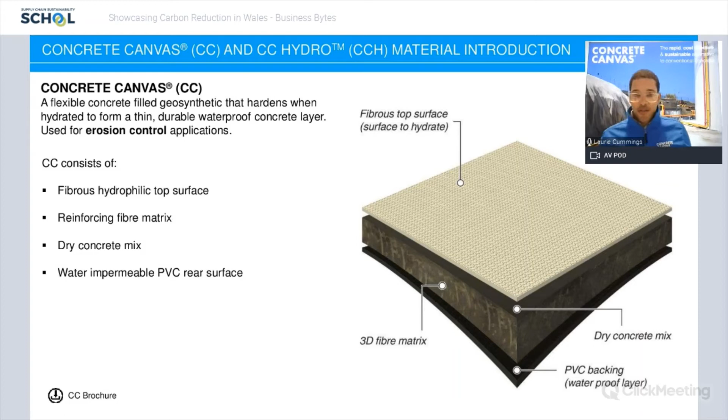Now, the primary use of concrete canvas is for erosion control, and it's used across the civil engineering industry, from the rail to the road sectors, public works, so you're looking at your local councils, and across into the mining and petrochemical industry. So there you can see in the presentation what concrete canvas is, it's cut through the material. We also manufacture concrete canvas hydro, which combines the erosion control solution, which is concrete canvas, with that blue hydrocarbon resistant geomembrane backing.

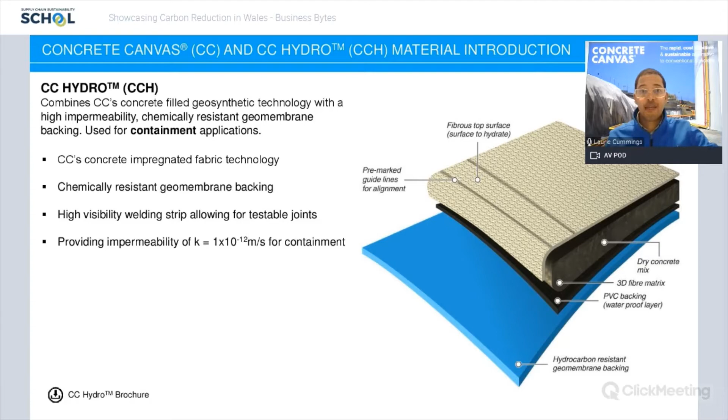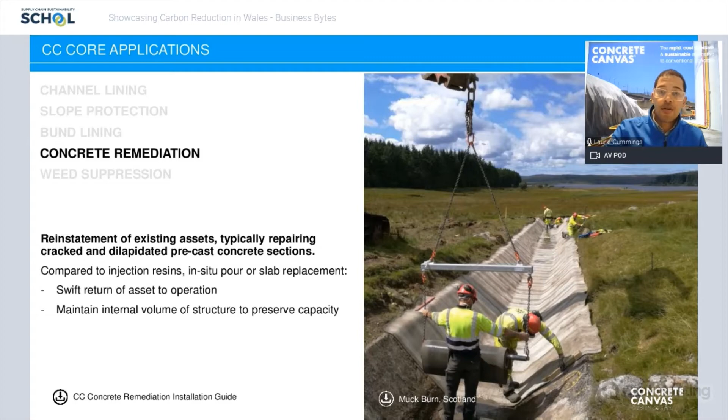That means the concrete canvas hydro material can be thermally welded to give an impermeable, totally waterproof barrier, and it's used for containment. So when we think about concrete canvas and its applications, it's used for rapid channel lining, slope protection, bund lining in the petrochemical industry, concrete remediation, so relining old concrete assets, and weed suppression.

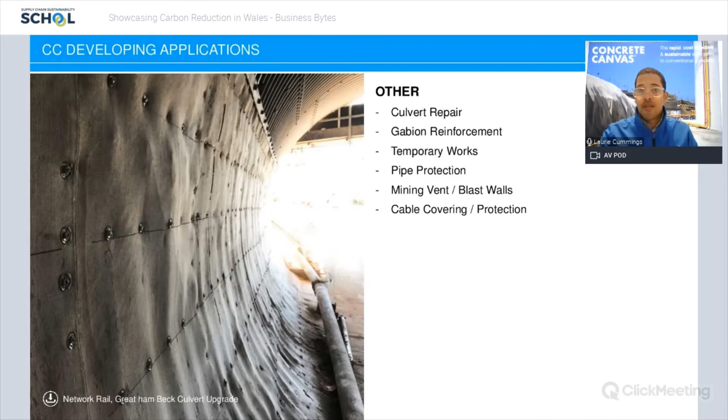And here's a list of the other applications it's used for, as you can see here: culvert repair right through to cable covering and protection.

Moving on to the sustainability credentials of concrete canvas: in 2020, we commissioned Ricardo Energy and Environment to conduct a life cycle analysis of the concrete canvas material and compare it to ST4 poured concrete. ST4 concrete is a widely used strength of concrete on site.

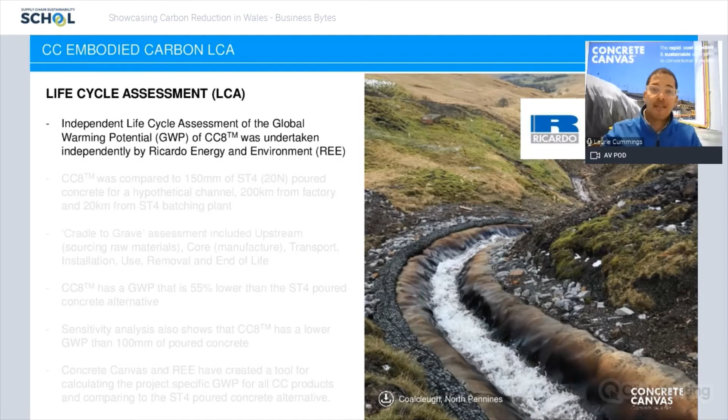And typically it could be installed on a channel for channel lining purposes. So we got Ricardo Energy to look at the life cycle analysis from the sourcing of the materials, our upstream carbon footprint, compared to ST4 poured concrete for channel lining at typically 150 millimeters thick, and compare the carbon analysis and global warming potential during installation right through to removal and end of life.

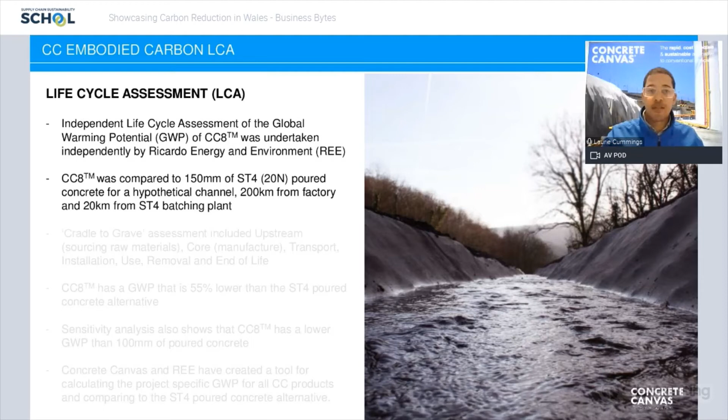The concrete canvas material is 8 millimeters thick. It can be as thick as 13 millimeters and as thin as 5 millimeters. Our most commonly used material is the 8 millimeters thick.

We compared it, and the Ricardo Energy report found that using an 8 millimeter thick concrete canvas material would give you a global warming potential saving of up to 55%. That's because you save on using a carbon-rich product that is concrete, as you use physically less concrete. When the material is only 8 millimeters thick, compared to 150 millimeter thick ST4 poured concrete, you're not going to need that much material.

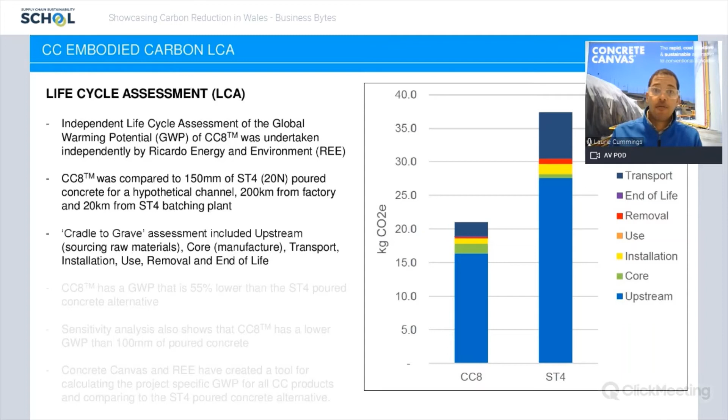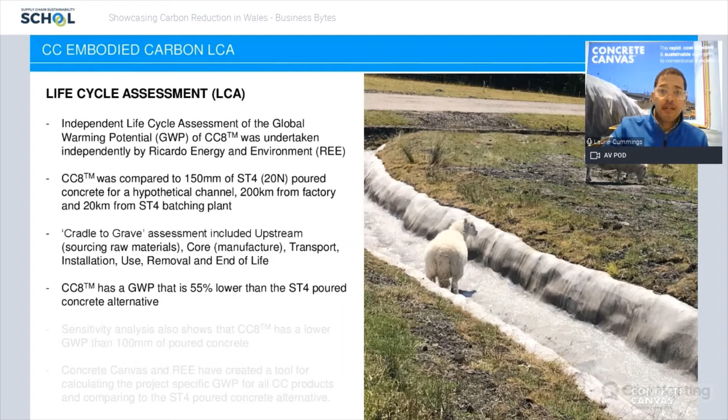Also, and more to follow on the user benefits of concrete canvas, you've got a very low logistical footprint. You can fit more concrete canvas on a vehicle than you could for ST4 poured concrete. Even if you were to reduce the amount of traditional concrete on site, you would still realize savings when using the concrete canvas material.

Continuing with the sustainability of the material, we have a range of typical clients, and we've been specified on a number of Natural Resources Wales projects, one being the Cynrig hatchery in South Wales.

Environmental bodies such as Natural Resources Wales specify the material because they realize it's got a lower carbon footprint and it's also a sensitive material for the environment. This particular project was right next to the Cynrig salmon hatchery, south of Brecon.

Just quickly touching on the profile: we're a Welsh company, based just outside Pontyclun, just off the M4. We're situated at our latest factory, which we've renovated.

In terms of sustainability of the workforce, the majority of our workforce live in the Rhondda Cynon Taf Council. We're an excellent employer of local workforce, but we are also an internationally based company.

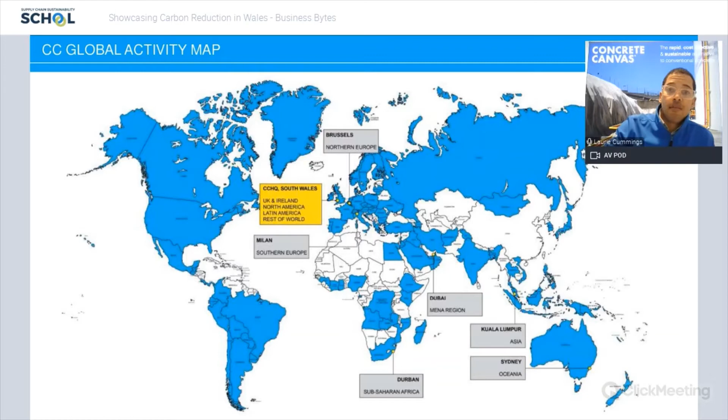As can be seen here from the global map, as of last year, 80% of the material was exported to over 80 countries across the globe.

Our clients are numerous, but within the local area, I've worked with the South Wales Trunk Roads Agent, North Wales Trunk Roads Agent, Natural Resources Wales, Welsh Water, and a myriad of local councils and unitary authorities.

The local contractors we work with include Alan Griffiths, Waters, and Jim Davis. There are quite a few local Welsh-based contractors we work with that recognise the value of the material.

This was just a snapshot of some of the councils I've worked with locally here in the Vale of Glamorgan, ranging up to Anglesey Council, who I presented to last week, as well as North Wales councils such as Gwynedd, where we've installed on the A55.

As a reminder, the concrete canvas material is an erosion control material, and we also combine it with a hydrocarbon resistant geomembrane backing, which can be used to contain liquid.

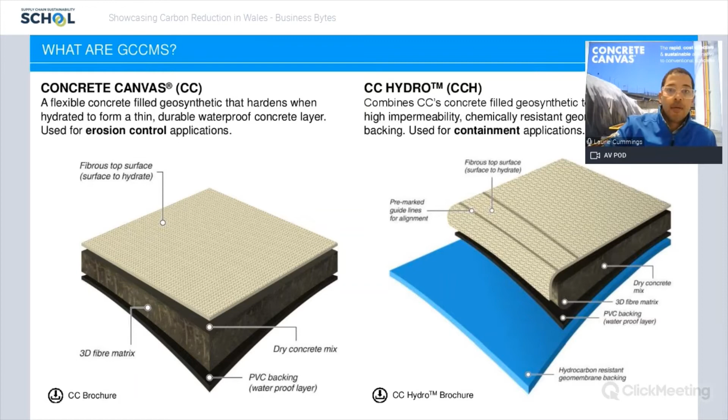This is where you start realizing your sustainability and carbon reduction, because the amount of material contained within a roll lowers the logistical footprint, since you need less plant on site and you can transport more of the material than traditional concrete solutions.

We're very happy to hold our BBA certification, which means that in terms of longevity, the material, when installed for channel lining, bund lining, or slope protection, will have a design life of 120 years. So you don't need to go back and replace the material, increasing your carbon footprint, transport costs, and fuel use. You can leave the material in place for longer than you would with poured concrete, concrete channel sections, slab concrete, or sprayed concrete.

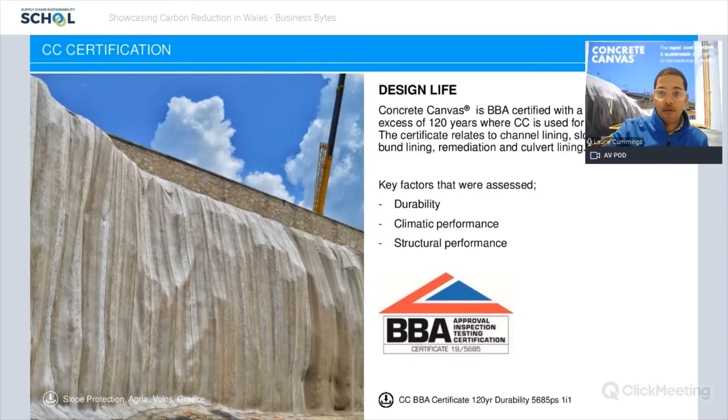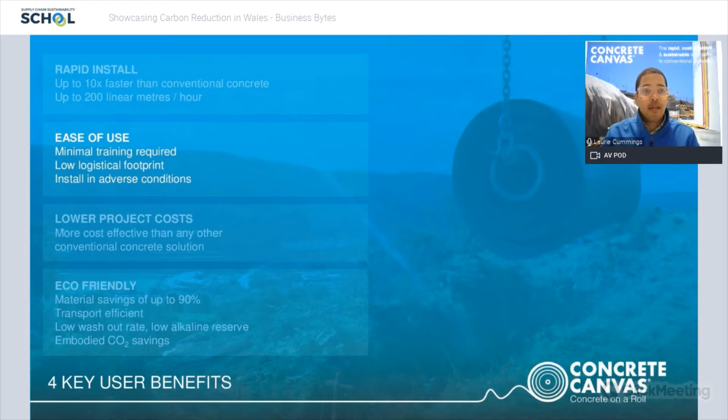Moving on to key user benefits: we're rapid to install, up to 10 times faster than conventional concrete. We're also very easy to install—you don't require specialist contractors or specialist training. The low logistical footprint is a key advantage, and you can install concrete canvas in wet weather.

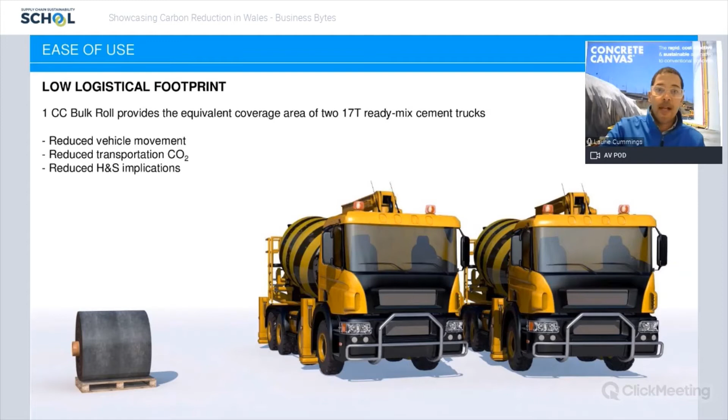This schematic is a comparison. You've got on a pallet our 8mm thick CC8 material, which will cover 120 square meters. If you were using the equivalent poured concrete, spread at 150mm thick, you would need two 17-ton concrete wagons on site. So reducing the logistical footprint impacts your CO2 emissions, because you don't need to transport and emit as much CO2 on the road. Just look at the sheer amount of concrete material used—one palletized load as opposed to two 17-ton ready-mix concrete trucks.

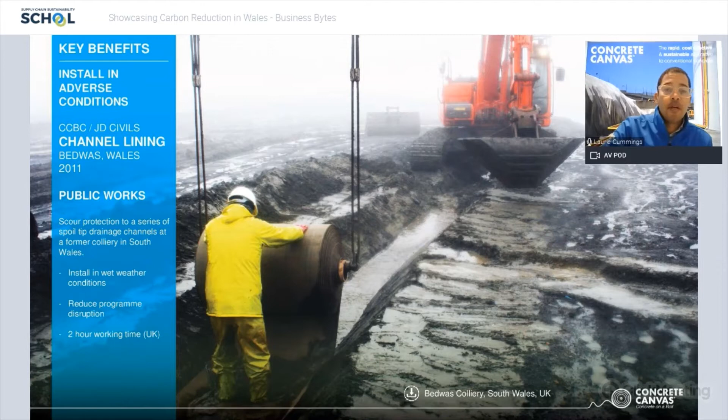You can install the material in the wet, so you don't lose time waiting around on site for better weather. The material has a 2-hour window—once hydrated, it will start to set after 2 hours, and it will also set underwater, so you'll save time on site. You will lower your project costs because of the speed of installation.

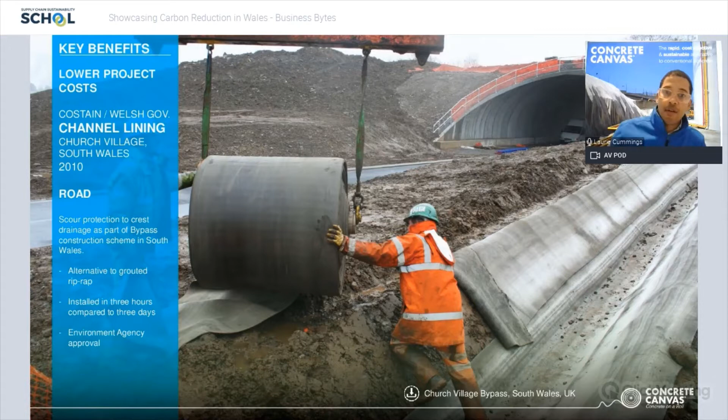This was Costain in South Wales, on the Church Village bypass. They used concrete canvas as an alternative to riprap lining, which is typically a stone lining with concrete used to prevent erosion of a channel. That would have taken them 3 days and a lot more concrete, but they managed to line this channel in an afternoon, making up 2.5 days in their program.

The fourth key user benefit is the eco-friendly nature of the material. I've touched on the fact that you use 90% less material with concrete canvas. It's transport efficient, and it's got a low washout rate and low alkaline reserve, which means that when you install and hydrate concrete canvas, the washout will not alter pH levels of local and adjacent watercourses—so local flora and fauna are not affected when you install next to a river.

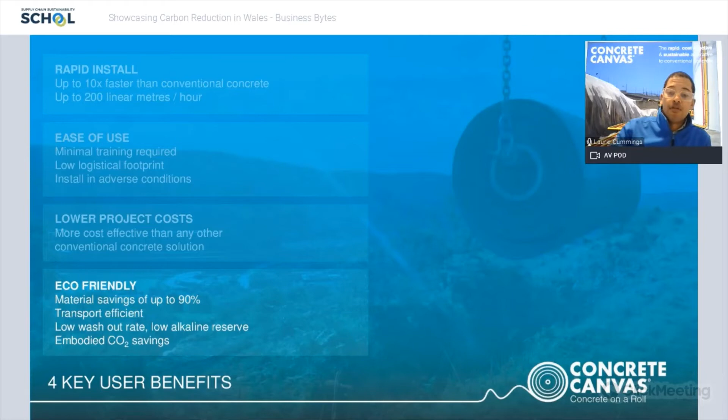To conclude, I'm going to touch on two Welsh case studies that highlight the effectiveness and sustainability credentials of concrete canvas.

This one is up in Scotland. I'm highlighting it because concrete canvas was used to reline an old concrete channel. The client was Scottish Water, who had a 1.5 kilometer long channel that over time had become cracked. There was vegetation growing in the channel, and they were losing a lot of water, spending tens of thousands of pounds every year on maintenance. That has knock-on effects of increased carbon footprint from repeatedly installing concrete or mobilizing a workforce to a remote site. So they wanted a solution that saved on maintenance primarily, but also meant they would not have to return to site long term.

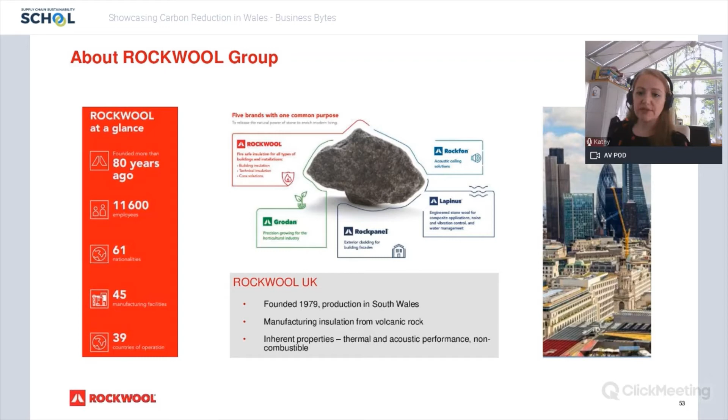So Rockwool itself is a family of brands. We've got Rockwool, which is the insulation material that you may be more familiar with. We also make horticultural substrate, cladding board, ceiling tiles, and engineered fibres for acoustic control and for water management. So quite a wide variety of uses for stone wool.

This presentation is focusing on our target setting, why it's important to us, and how to succeed. I'm going to cover basically target setting as part of your purpose and culture of your organisation, robust data and how important that is, top management oversight of targets - if you haven't got that sort of push from the top, it's going to be much harder to make those targets stick and to meet them. Collaboration - we can't do it all ourselves. And then I'm going to just briefly go into what our targets actually are and what they mean for us.

So our sustainability strategy focuses on the UN Sustainable Development Goals. There's 17 of those, of which we've selected the 10 that we can make a real material difference to. So our products positively contribute towards all 10 of those goals, but we also recognise that our operations have a footprint, and therefore we've set 6 operational targets also aligned to the goals to minimise that impact.

As I mentioned, we are a family of brands, so where you may not think of zero hunger and clean water as necessarily being an insulation business's job, we do make that horticultural substrate, and this goes across the globe and across all of our brands. So everything we produce helps to combat climate change in one way or another, grow the circular economy - that's a core part of our business - or safeguard citizens' well-being. And all of our operational goals are aligned to those aims.

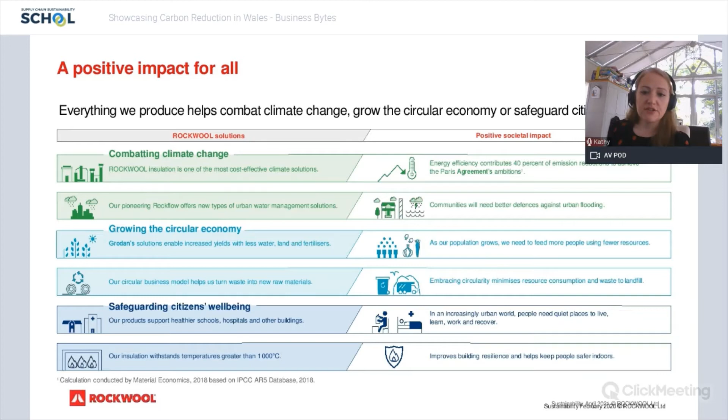So just reflecting back on our recipe for success that I put a few slides ago, the purpose and culture - sustainable is integral to our business strategy. The robust data - we pursue fact-based, auditable approaches backed up by third-party reference methodologies. We don't stick our finger in the air and have a guess at where we need to be, we look for the kind of gold standards out there - those are the ones that we align to. The Sustainable Development Goals being core to our sustainability strategy, and more recently the science-based targets that we've attached our decarbonisation goals to.

For the last reporting year, the performance against our 6 sustainability goals has been verified and assured by an external party for the first time. So that's feeding back into that robust data, the sort of assurance that we're not policing ourselves - we're putting it out there for third parties to do that job - and also collaboration. Like I said, we can't do this all ourselves, so we're looking at the best practice out there, getting on board with that.

Slightly out of order, because on the next slide I'll mention who the Science-Based Target Initiative are. But there are currently around 1,000 companies that have made a commitment to set science-based targets, and around 500 of those have gone through the approval process. Most of those companies tend to be financials and real estate - low energy intensive. Rockwool would be considered an energy intensive company in terms of our production, and those kinds of companies are very much in the minority at the moment. In the top 10 diagram on the right, construction and engineering comes in at number 13, construction materials 21, building products 22. So there's only 11 companies at the moment engaging with the Science-Based Targets Initiative.

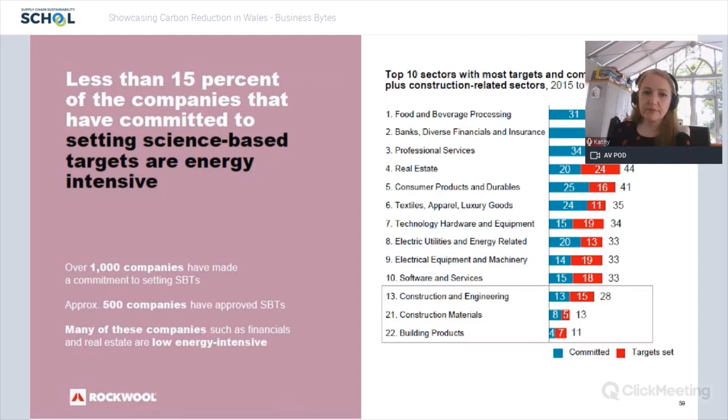These were the questions we asked ourselves in the setup. What is the Science-Based Target Initiative? Do they have credibility in their setup, governance and approach? They're a not-for-profit partnership between the Carbon Disclosure Project, the UN Global Compact, World Wildlife Fund, and the World Resources Institute. So there's a huge amount of credibility in terms of who they are and how they conduct themselves.

What is the science behind science-based target trajectories? They pull together resources to provide technical assistance to companies engaging with the initiative. They define and promote best practice in emissions reduction methodologies.

There are a number of metrics along which you can align your targets - 2 degrees, well below 2 degrees, and 1.5 degrees as set out in the Paris Climate Agreement. Our trajectory aligns with the well below 2 degrees endpoint. So how are emission scenarios allocated?

Is there flexibility? I'll come back to why that's important in a couple of slides. What are the targets relative to? What are they going to achieve?

We wanted to see examples of companies like us. There aren't many of them, as I mentioned on the previous slide, but we weren't the first to go down this path. And what was the process post-validation?

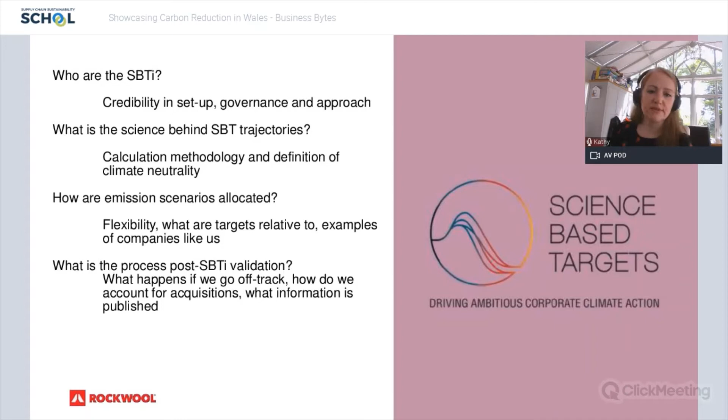So Rockwool itself considers ourselves a carbon negative company. There's a building insulation that we sold in 2020 that will save 100 times the carbon emitted and energy consumed in its production. Now, when we say used in production, we're actually talking about the extraction and transport of raw materials, as well as the actual manufacturing process itself.

We're big supporters of life cycle assessment and environmental product declarations. In the last few months, we've had an update to our environmental product declaration for our production facility in Wales. Since 2016, we've reduced the life cycle embodied carbon of our product by 28%, which is something we're incredibly proud of.

But we're looking to, across our global family of brands, decarbonise our business and our value chain. So in December of last year, we set 2 science-based targets: to reduce our scope 1 and 2 emissions by 38% by 2034. Scope 1 and 2 being the combustion fuels we use on site, and also the embodied energy of the electricity supplied to site.

And our non-factory absolute life cycle greenhouse gas emissions, our scope 3 emissions, by 20% by 2034. Now, what is particularly important about the way we structured those goals is that we know through life cycle assessment and through our environmental product declarations, the majority of our impact happens in the production phase. So our scope 1 and 2 emissions - reducing those will have an enormous impact on the embodied carbon of the product.

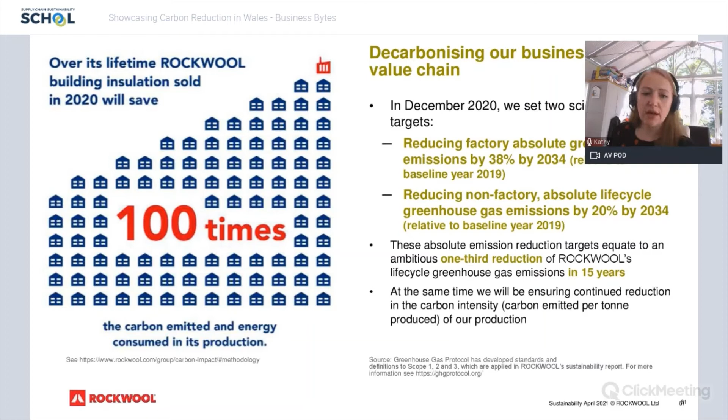Now, I mentioned about the sort of trajectory, and decarbonisation is not going to be a linear process. From our perspective, we've made a number of changes over the last few years. I mentioned that 28% reduction in our embodied carbon over the last 5 or 6 years.

The big changes are going to come through changes to melting technology, and some of the technologies that are going to be needed to achieve science-based targets and ultimately the net zero targets by 2050 may not have been developed yet. But the goal setting is important because it means we've set out where we need to go. We know where we are, where we need to be, and then we can start to plan what changes can happen over time. So we've got our group technology and research and development departments working on new melting technologies, and when they come in, they'll bring about these big drops in carbon emissions.

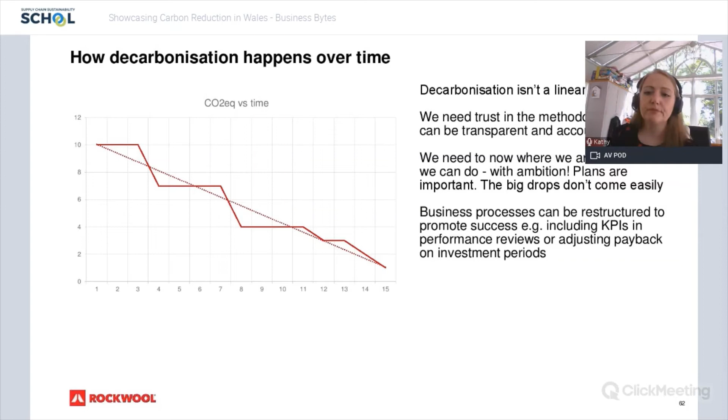So I focused today on decarbonisation and our science-based targets. There's an awful lot more going on with sustainability. I mentioned circular economy - that's a huge part of our strategy and the way that we do business. We make a recyclable product, and we incorporate waste from other industries in our product as well. You can read more about that in our 2020 sustainability report, which is available on the group website now. Thanks very much.

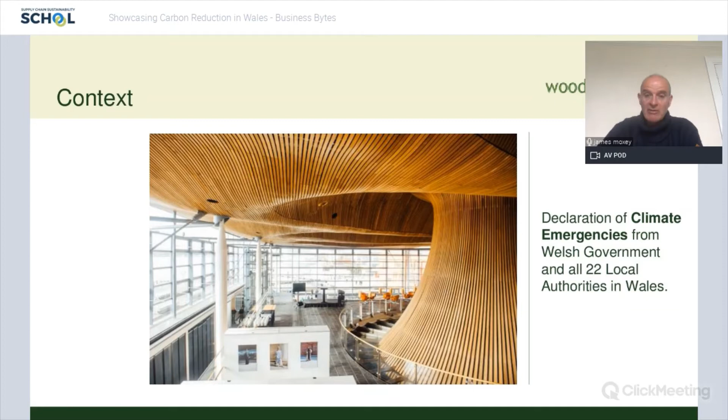So construction obviously has a significant role to play, not just in terms of the material choices we make, but in terms of our design decisions and our build methods and the consequences of these for the energy demands for the future, the energy needed to heat the homes.

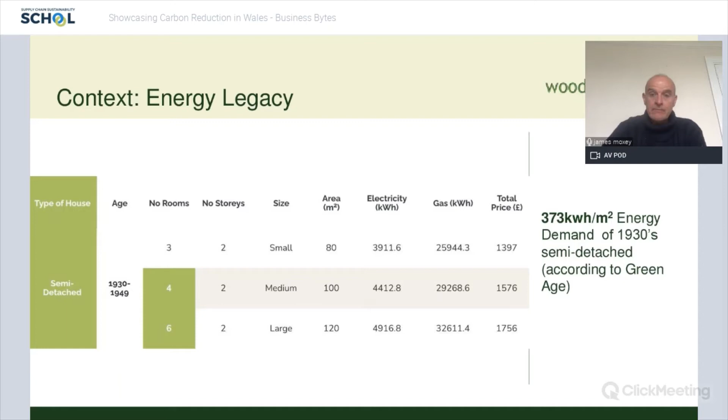So our brief was to develop a net zero whole life carbon build solution. And when we say whole life, we mean the carbon emissions in construction, in sourcing materials, the construction, the manufacturing, and then the energy used within the home and the carbon footprint associated with that energy over a 60-year lifespan, and then also to take into account the end of life, so demolition and potential reuse of materials.

We weren't planning on doing something radically new. It was really important for us to work with the supply chain and to focus on an evolution rather than a revolutionary design. And we wanted to reflect the build systems that are currently in use, and that there would be, and accepted there would be some evolution driven by a set of clear priorities.

We need to reduce the energy demand from our homes. We need to reduce the embodied carbon materials that we use to build homes. We've got to eradicate the use of fossil fuels to heat our homes. And really importantly, we need to do something about the performance gap so that what is built reflects what has been designed and modeled.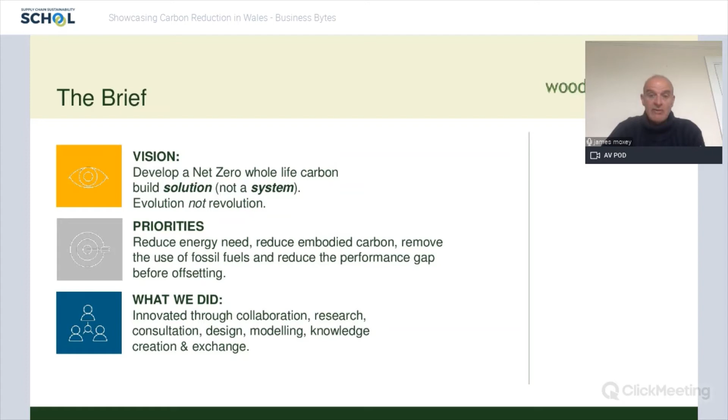So I was fortunate enough to assemble a team of experts with a wide breadth of knowledge across different disciplines, and they all did incredible work on this project. I know we shouldn't single people out, but I'm afraid on this occasion, I'm going to. Rob Thomas, Dr. Rob Thomas is a friend of mine and a colleague who worked with me throughout to develop the research that we did, and you can download that report from our website at Wood Knowledge Wales.

And I had the pleasure of spending many hours debating, discussing, researching, and fundamentally driving this project forward with Rob.

It's always a good thing to have a research framework within which to respond when you're undertaking a project like this. We were incredibly lucky that at the time we started, the UK Green Building Council had published a net zero whole life carbon framework, and this became a guide for us along our journey.

I'd argue they led and continue to lead this agenda, providing a steer to other organisations such as the Royal Institute of British Architects, who subsequently set some really challenging targets for us all to think about in terms of operational energy demands for housing and embodied carbon impacts. So the 2030 targets are what we were focusing on.

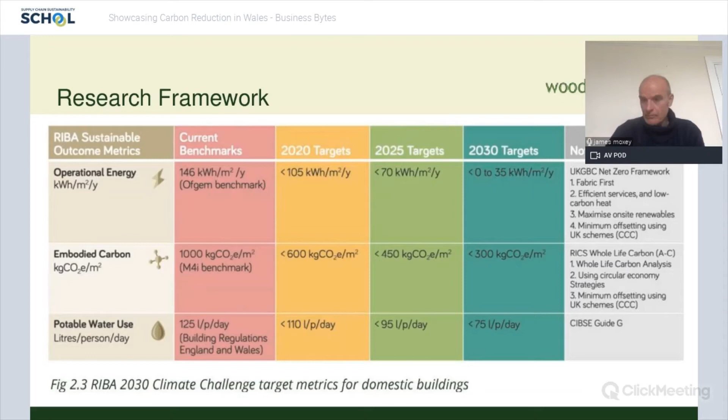Subsequent to these targets, Wood Knowledge Wales and a team of colleagues from different partner organisations developed our own net zero whole life carbon framework for Wales.

We put together a series of guiding principles: do everything we can to minimise embodied carbon. We set ourselves a target of 300 kilograms of CO2 for upfront carbon, which is arguably our priority - to reduce carbon that's emitted now. That's our biggest problem, considering the timescales given to us.

And also, as I said, to get energy demand to 35 kilowatt hours. Only use renewable energy - we need to stop using fossil fuels. The importance of minimizing the performance gap is where our collaboration with the skills and education sector across Wales comes in, working to make homes built as modelled and designed, and then an offset solution to below zero.

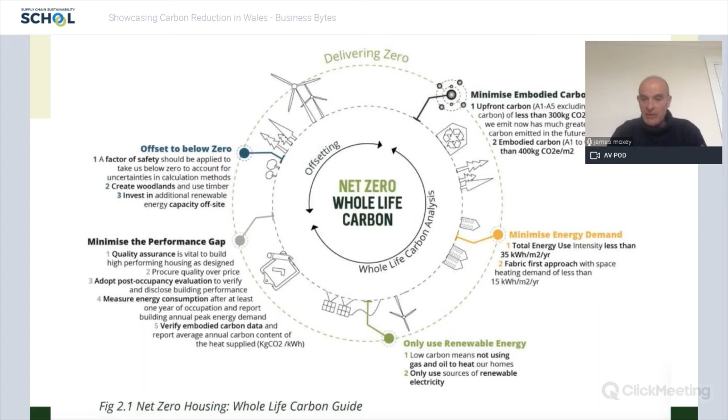As you can imagine, we're really interested in planting trees and increasing the amount of tree cover in Wales, and that's where we're focusing. We say offset to below zero, so if you miss, hopefully you'll achieve zero - there's a level of tolerance there.

If we're going to genuinely respond to the climate emergency, we need to consider our total CO2 emissions in terms of building and living in homes. As you can see from this diagram, 50% of carbon emissions take place before someone is handed the keys to move into a new home.

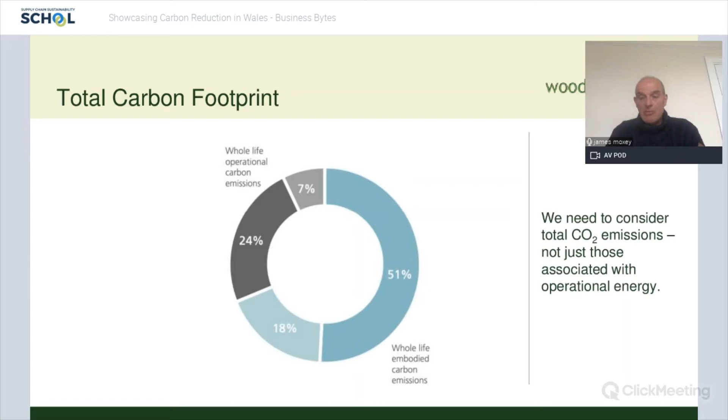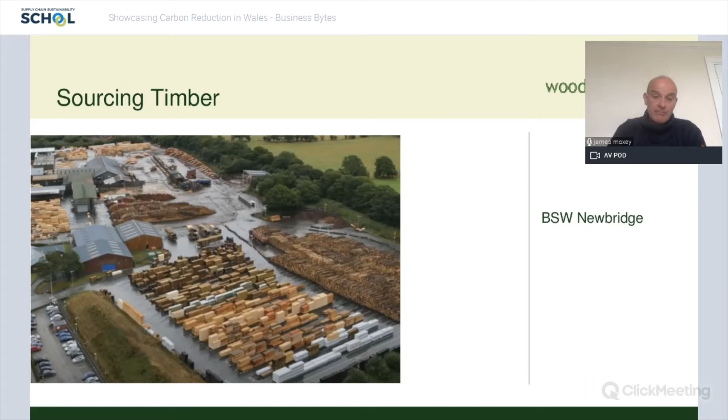And there's a relationship between material choice and locality as well. We have one mill in Wales processing construction grade timber for home building, but a significant number of offsite manufacturers will source their timber from other sources. You can buy Welsh and homegrown timber from most of the building merchants in Wales, Jewson's in particular.

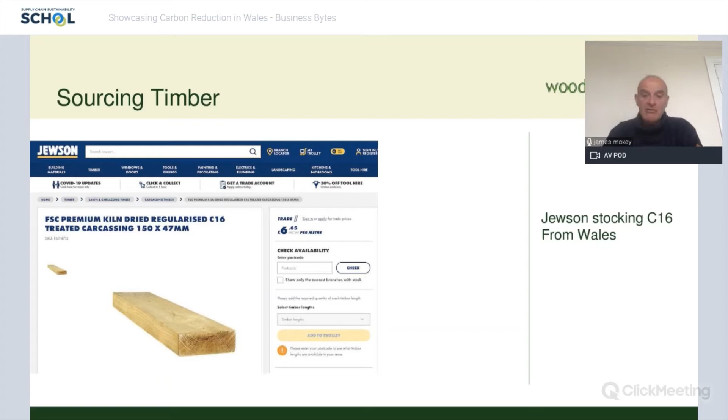I don't have any liaison with Jewson's apart from occasionally buying their timber, but they sell C16, which is grown in the UK. Most of our offsite manufacturers tend to use imported timber for a number of different reasons, but we're working hard to try and make their sourcing more local and address some of the challenges associated with that.

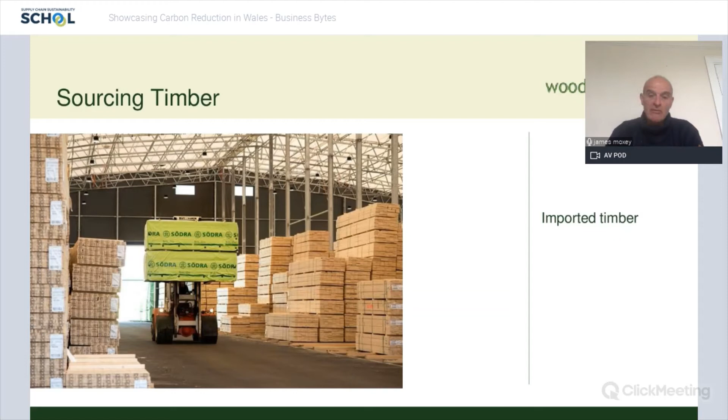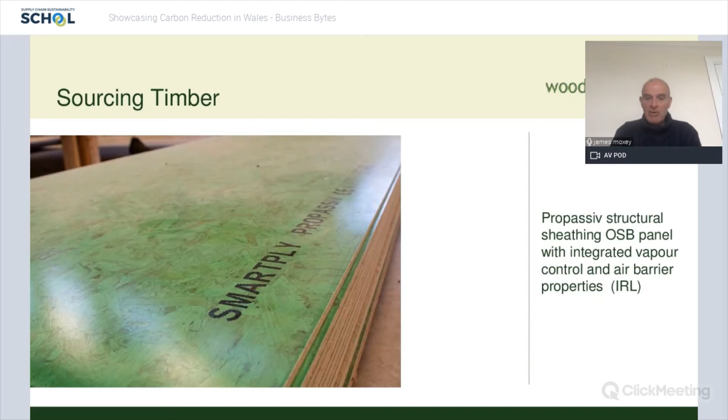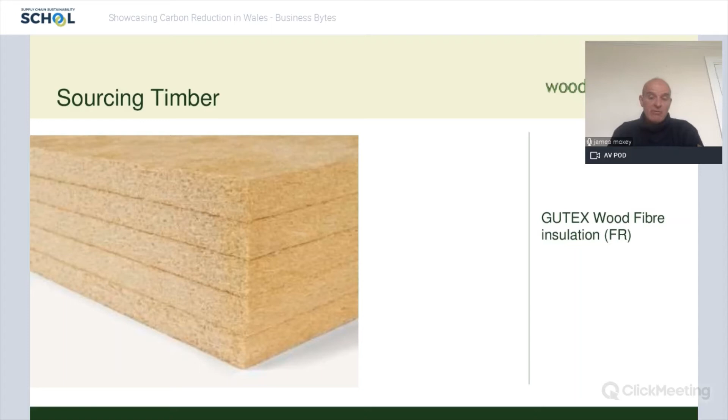And wood fibre insulation is something we're really passionate about, as well as blown-in cellulose. But this wood fibre is sourced from Germany, I believe - Gutex.

What you can see here is one of five closed panel fabric designs that we developed within this research project. It's not a revolution here - like I said, this is what you might refer to as an advanced timber frame design. But it's important for us to look at the supply chain to see what they're currently developing, and make sure what we propose fits well with that.

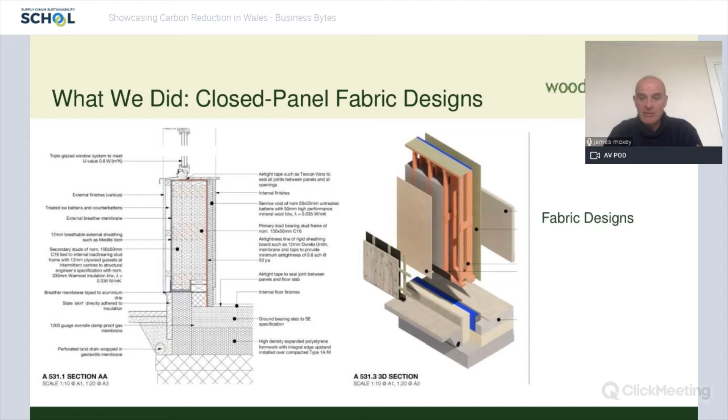A significant number of the products in this panelized system come from Wales or from the UK, but there are some products we can't source locally, and that we do import. It's interesting to note that our internal insulation is a mineral insulation. The main fabric is composed of homegrown timber and wood fibre insulation, or blown-in cellulose in the fabric. So we developed a series of fabrics.

Importantly, we did a series of embodied carbon assessments. As our previous speakers mentioned, Kathy, about science-based targets, we used embodied carbon assessment software, and we looked at as many EPDs as we could find to get the data behind what we were doing. And when we started modeling it, we realized that we had a benchmark product, which is what the industry tends to build or has been building, which has got a foam insulation. And when we analyzed our fabric designs against that, we were getting savings of around 75% in terms of embodied carbon. And this is all, as Kathy said, science-based.

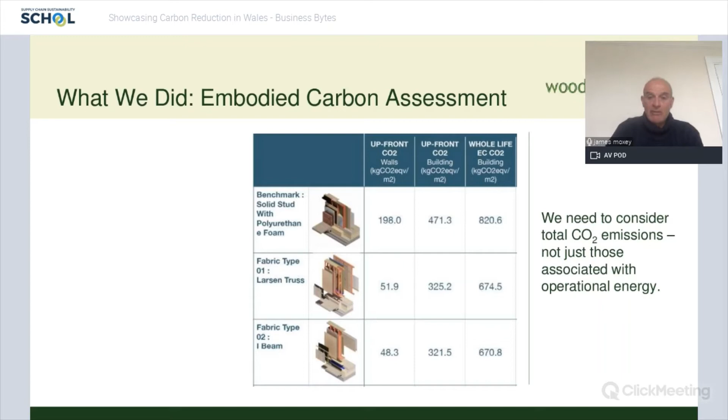It was truly a fabric-first approach, and based on scientific analysis. So one of the more important findings for us was looking at the principle of form factor and reducing the energy demands of housing. We considered a whole range of variables: orientation for solar gain, U values of walls, and heat loss form factor.

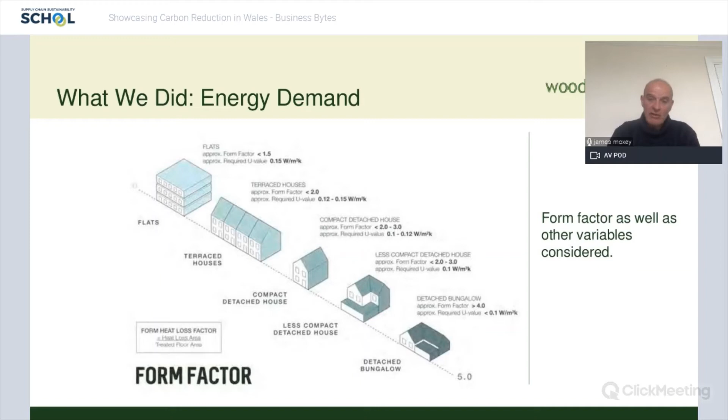Which is the ratio of the thermal envelope surface area to treated floor area, this is a crucial piece of research, and the findings were really important for what's followed. What this diagram shows is that the smaller the form factor, going from right to left, means less energy demand or less U values required to maintain the same energy demand. This was a fundamental principle that we factored into our research.

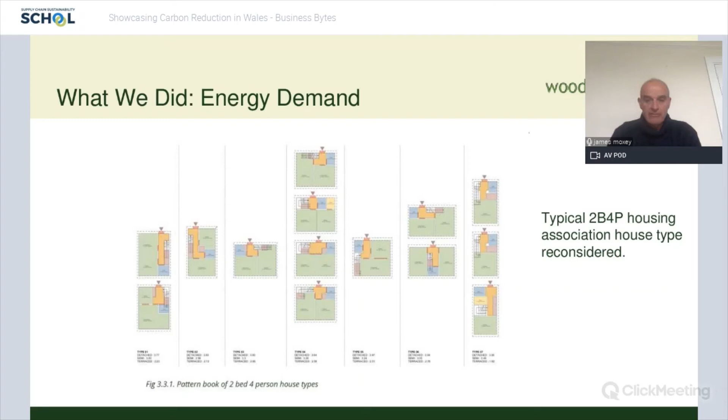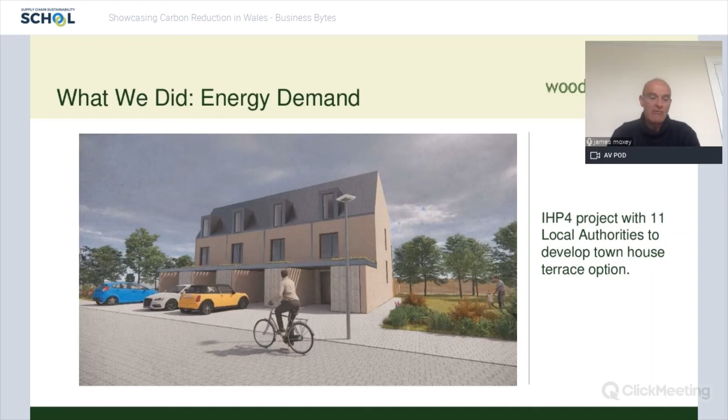And then we also looked at the footprint of housing. So on the left-hand side is a footprint of a home that is currently a typical housing association 2-bed 4-person home, and we looked at it and we modified it in the design at the design stage and reconsidered it in terms of various different layouts. What emerged was a design around a townhouse, a 3-story townhouse, and we started considering these in the form of terraces.

Or total energy demand would be in a range of 20 to 25, which is well below RIBA's target for 2030. If we could get to 25, we'd be smashing RIBA's target well in advance. And this really helped change our thinking.

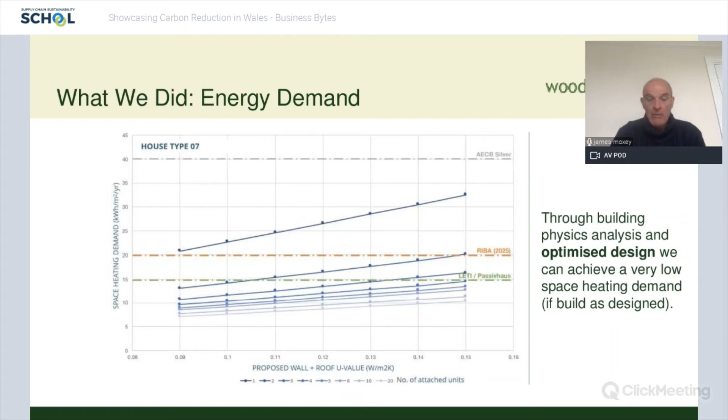When we've modelled it in our work, we estimate that to offset a 100-house scheme, we're looking at a cost of between 1% and 2% of the overall development cost to offset it through a small planting scheme, if we do everything we can to reduce the energy demand and reduce the carbon footprint of these buildings. So it's quite modest, and housing associations are now working with us to look at woodland creation schemes which benefit their tenants and benefit the local community, and also make a sensible investment for them financially.

And actually it's quite a profitable investment over the long term. You know, housing associations have 40, 60-year business plans, which is perfect for a woodland creation scheme, which, you know, take that kind of time scale.

The good news is, and to finish, the good news is that we're now working with at least 11 local authorities, taking this work to the next stage through an innovative housing programme funded grant. We've just submitted the report for that, and we've developed a draft technical manual for this townhouse, and we're hoping to work on a whole range of house types, applying this thinking as part of a council house building programme to build thousands of homes which address both the climate emergency and the challenge of delivering homes that the people of Wales need.

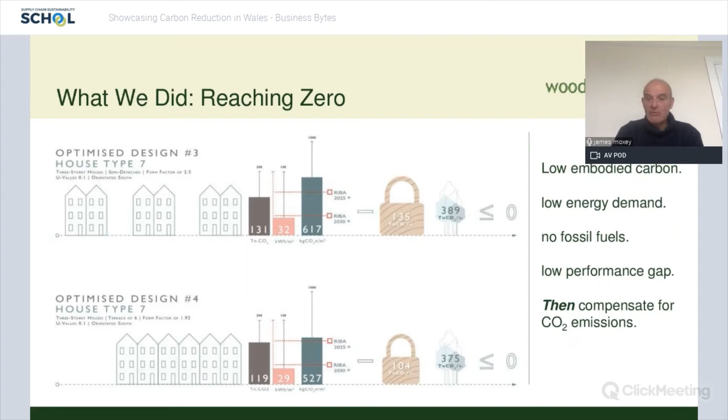Thank you, James. That was really, really interesting, and I think the thing that stood out for me was the 373 down to 35. That is bold. That must have kept you up at night.

Just a quick terminology thing, James. Do you want to take a couple of minutes and explain the performance gap? Because I know it's really important. Yeah, it's a fundamental issue for us.

We work really closely with our clients and members who are clients, like the housing associations and offsite manufacturers in Wales. There can be small changes in the way certain products are installed that can have a significant impact on the lifetime of that product, for example with rain screens or how they're attached to the fabric system, or all aspects of housing. We need to specify it correctly based on the most up-to-date available technical and scientific way of doing these things. And then we need a workforce that is able to interpret that and install those systems correctly. I think that's what we're talking about in terms of the performance gap.

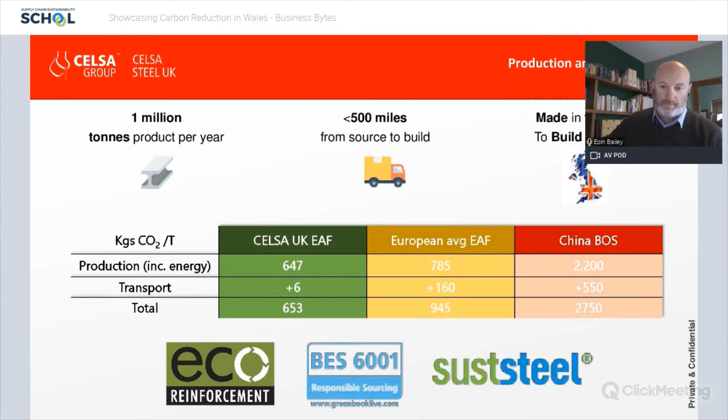So, Celsa is an integrated steel producer, meaning we're integrated into our supply chain. We have scrap processing capabilities, and we have the melt shop, which I didn't mention before, based in Cardiff. Anyone who's driven into Cardiff from the Newport side will be well aware of who we are, and we're well aware that we exist, maybe not exactly knowing what we do on those sites.

We produce the steel with the two rolling mills we've got in Cardiff, and then we send out the rolled steel to fabricators across the UK. Listed here are BRC, Express Reinforcements, ROM, and ROM Tech. These are all downstream operations under the Celsa family umbrella, and therefore we can deliver made products to site ready for installation.

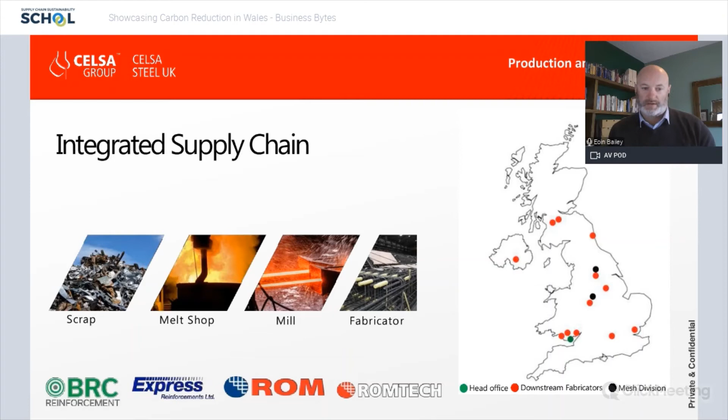A little bit about the process we follow: going through the melting of the steel using electric arc furnace. Anecdotally, I like to call it a lightning storm in a bucket. About 150 tons of scrap steel is put into a furnace where electrodes come down, and the energy generated, charged through those electrodes, will melt that steel within about 45-50 minutes.

We refine. We have a second process then which refines. I'm going to apologize and put you on hold, my dog will bark.

Sorry about that. So we refine the process, and any additives will go in to make sure we get specification steel correct, and then the molten steel will be put through a continuous caster to produce billets.

Now those billets get sent off to the two rolling mills we've got in Cardiff. One is the rod and bar mill, which produces the products you see below - rod, wire, and coil - and then the sections mill produces channels, flats, angles, and so on. Those two different types of products in the two different types of mills probably go to different areas of industry.

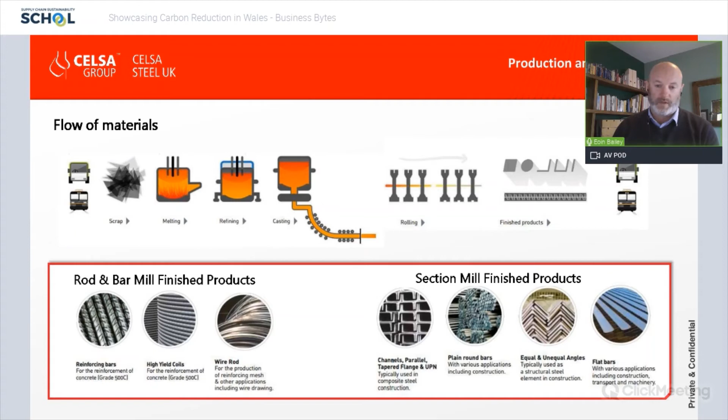We have the capacity to produce, process, and deliver 900,000 tons of reinforcement within our site in Cardiff. All our rebar has a UK stamp to highlight the fact that it's a UK made manufactured product, and we are certified to provide materials into the nuclear industry.

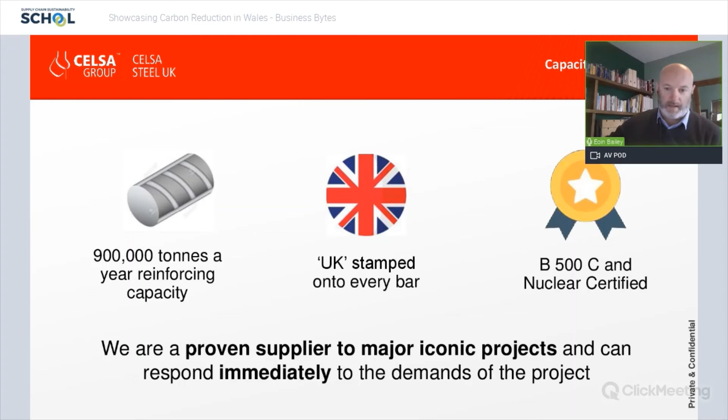And yeah, we just again highlight the fact that we are a major supplier into the UK, major iconic projects, and we're qualified to do so.

So we're making steady strides forward into enhancing our environmental credentials and making sure that we are the steelmaker of choice. We also have a zero carbon ambition, and it's something we're in the process of developing, our zero carbon pathway. I did question when my boss said he had a zero carbon ambition, whether that ambition was strong enough, and suggested we should look at potentially net positive in what we do and how we do it. But we are working towards that and moving in the right direction, I feel.

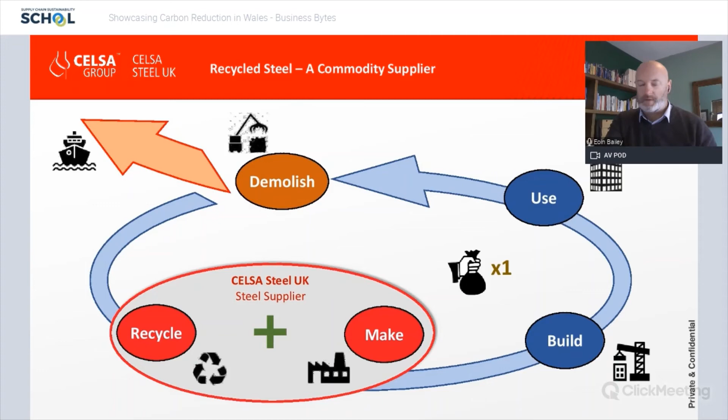So with that in mind, I'm keen to explore how we as a business can function within a circular economy and build these restorative solutions. Once an organization starts looking at how they can deliver solutions within a circular economy, there are a lot more opportunities, and ultimately it's all done through collaboration with your supply chain and your customers, and this is what we're trying to do.

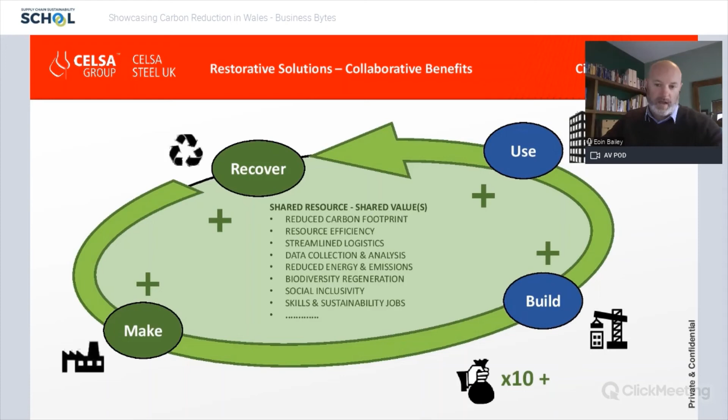And so this moves on to our pilot project, and I'm delighted to say this pilot project started life over coffee at a Supply Chain Sustainability School event in Cardiff a couple of years ago. I sat down and had a conversation with Amanda Wright, who I believe is on the call. We talked about what we could do together regarding the remit or ambition from BAM Construction, the area they were looking to advance to move their sustainability agenda on, and ultimately how we could support that as a business. That's how our conversation about collaboration started, exploring how we could come together as a combined collaborative solution for a project to start off with, and ultimately to look at how we can explore this.

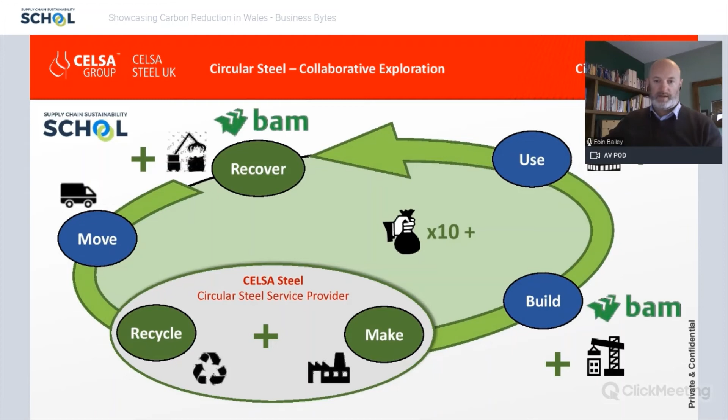And I would say within a circular economy approach, there's always multiple opportunities for benefits, not just in terms of the cash available at point of sale, but ultimately how we can add more and more value back into what we do and how we do it. So this conversation I had with Amanda at the supply chain school event ended up being the Plaza Cinema project.

The Plaza, anyone who knows South Wales would know that in Port Talbot we have a pretty iconic kind of building, in that it's the birthplace of a lot of famous actors from Port Talbot. It started life either visiting the cinema or I think it was a theatre at some point as well. This iconic building opened in the 1940s and stopped showing films, I think in 1999, and since then it's gone into disrepair and dereliction.

So the plan was that BAM were taking over the project for the redevelopment, but through the conversation with Amanda at the event, we started looking at exploring what kind of materials were coming through that demolition process, and whether it was possible to explore providing that scrap material effectively to CELSA directly. So this is where we started to explore and have this conversation.

There was some material that was able to be recovered from the project that wasn't able to be reused, but could be reprocessed. So we did, and we ultimately delivered that recycled material back to the same site for the redevelopment and rebuild of the new version of the Plaza Cinema Complex, which is effectively closing the loop on that steel. So circular steel is what we're trying to do, and being able to do that as a collaboration is something we've explored and achieved through this project.

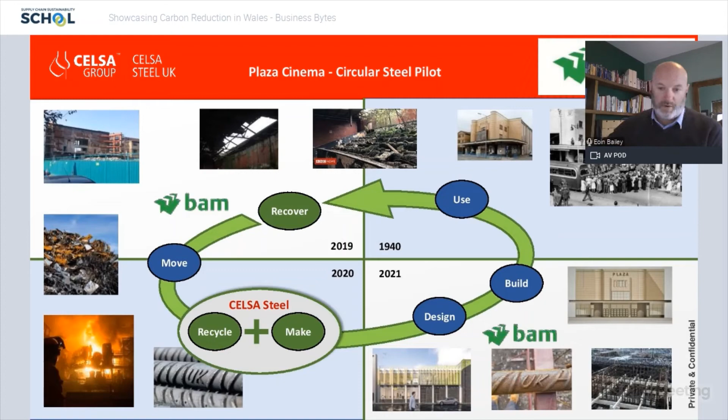Some more information about the project itself, the scope of works - I'm not going to go through them all, but we can share the slides, you can read through it. But I think the timeline is quite significant, with the fact that the event took place in September '19, and by January '21 we had materials on site being delivered - and this is including a pandemic and trying to figure out how we work and how we develop this collaboration.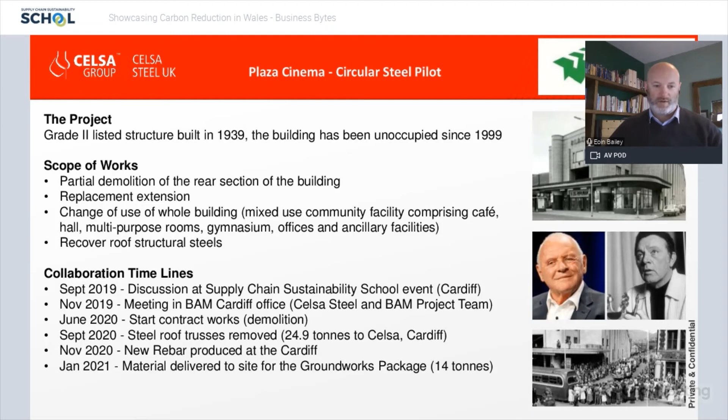If I go on to the next slide, just some of the drivers from BAM's point of view, and from CELSA's point of view, just some of the benefits that we could highlight based upon the material being provided. So 24.9 tons of scrap metal was provided by BAM, and it was the old roof joists that couldn't be reused as part of a circular economy, but could be reprocessed. So we took that material, reprocessed those 24.9 tons, and ultimately we were able to, in comparison to other producers across Europe, reduce the carbon footprint of that material quite significantly.

And just to add as well, UK Steel did an assessment on the value of keeping steel circulating, keeping steel within the UK. So it just highlights again that actually using a UK supply chain has benefits not just to the individuals involved, but the whole UK economy has an advantage by keeping that steel. So it's worth highlighting that when organizations are building projects, to make sure that the supply chain uses UK resources, and particularly in our instance, Welsh resources.

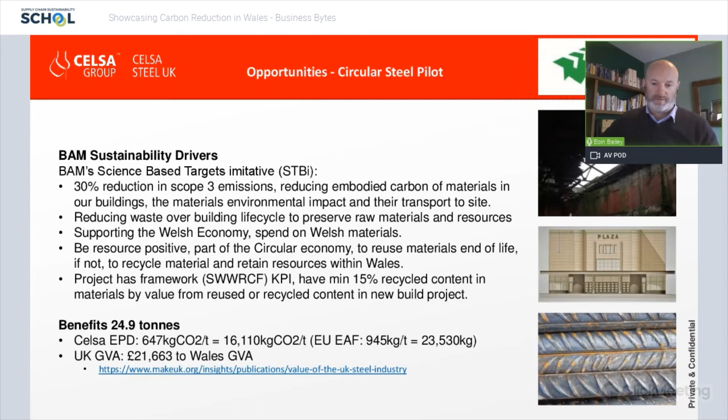Just a bit of a shout out to a project that a number of us are involved in, including Rockwool, is the South Wales Industrial Cluster, a combination of a number of organisations in South Wales coming together to look at decarbonisation as the main focus, particularly those hard to abate industries like steel makers and oil refineries and so on. But how we can come together to develop the concept of circularity is something I'm passionate about, and passionate about delivering within this context as well.

I think in doing so, we can start to redesign effectively our economy, redesign who we are and what we are as a nation. But ultimately, we need to be doing things differently. We need a future that is much more circular, an economy which is circular by nature. Because as good as we are at reducing our overall carbon footprint, including electric vehicles and wind turbines, if we don't understand how those things are made and what happens to those materials at the end of life, and if we don't look at designing more systemic solutions, then we're going to continue down a path that's not going to be beneficial to anybody. Whereas circularity, I think, is certainly a way forward.

That's me. I think just one thing to end on, and something again to highlight what I feel we've started achieving with BAM, is that collaboration is key to a restorative circular economy for future generations. And I think we are in a really strong position as a society to be able to do this more effectively. That's me. Thank you.